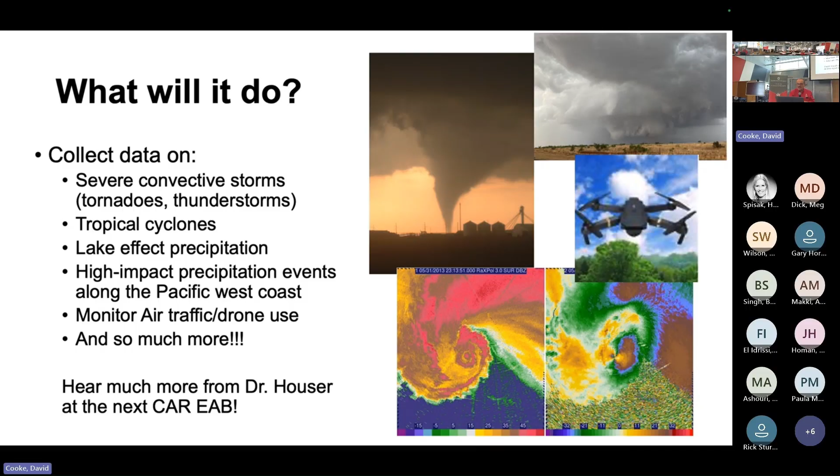Definitely one of our favorite parts of the year. For the next segment, we'll hear from each of our motorsports teams on what they've been up to for the last year and what they're going to do next year.

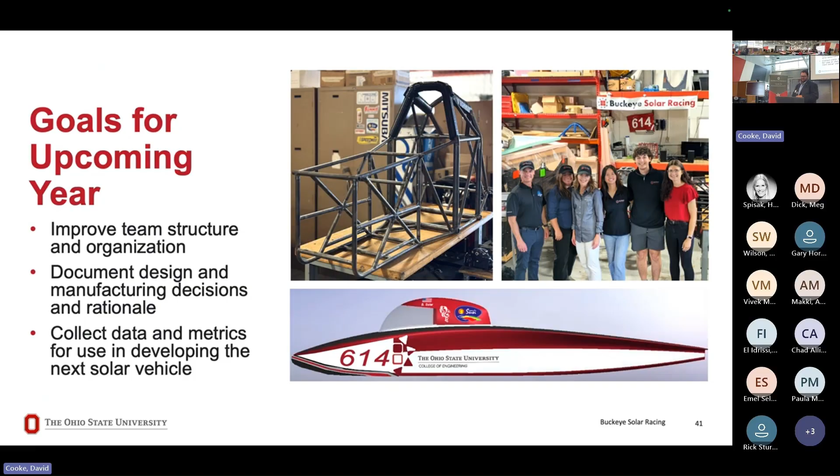So I'm here to talk about the Battery Workforce Challenge team, and I'm Niharika. I'm the software lead for the team.

Speaking a little bit about what Battery Workforce Challenge is, it is an advanced vehicle technology competition held by ANL, the Department of Energy, and Stellantis. Together we have around 12 teams that compete across North America, and our agenda is to build an entire battery pack from scratch. We've been given a bunch of cells from Samsung, from which we design our entire battery pack. We design the battery management system, and we also make our own battery pack from scratch with these components, and this allows us to create something that we can remove from the original Stellantis vehicle we've been provided and put in our own creation.

So this is our team. We have around 5 leads, and we have 5 subdivisions: project management, mechanical engineering, electrical engineering, and software. I'm the software lead for this.

Another thing about this competition is that all our teams are in tandem with a community college, which allows us to work with technicians and improve our skill in that arena as well. These are our advisors: we work with Dr. Dartino, Dave Cooke, and Ian Andrews from CSCC. We also have mentors from Stellantis who help us develop our ideas and make sure we get our deliverables on track.

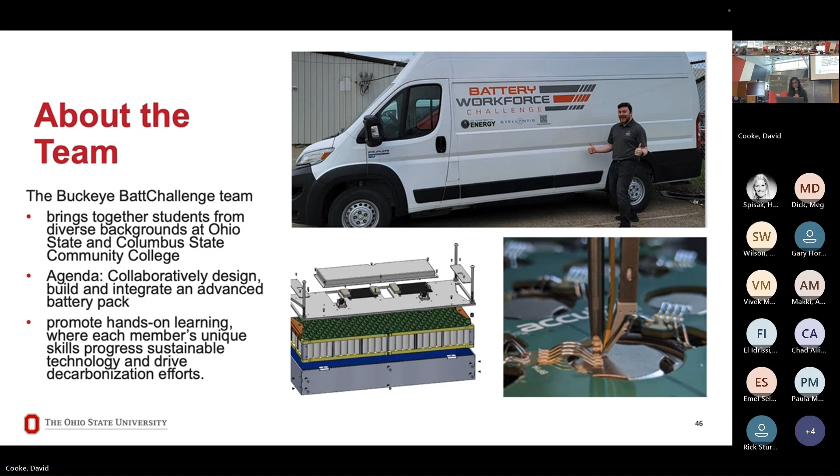So this is what our progress across the 3 years has been like. The first year we spent in team building and cell characterization, so we actually understood what we're supposed to do.

Last year we spent our time creating a battery disconnect unit and devising our design for the modules, which are very unique to our own team. Every team has its own design and their own plans on meeting those KPIs to make sure the same vehicle runs in different ways.

We also had to come up with our battery management system architecture and our thermal cooling design plate. What we did in the thermal plate was work with many other teams to create a common cold plate that would let us cool the battery down. This was a good initiative that we had with the company called Dana.

And in our final year, we're going to be putting this pack that we designed together — this is our final year right now. So we're going to put a lot of our efforts into creating the entire battery pack, and we will be integrating this into the vehicle.

A season recap of last year: we came in second overall. We also won a lot of awards in the arenas of project management and module building, as well as on the software side and the thermal side.

So we've got a lot of awards and we came second, but we're also going to be working on coming first next year. And this also comes with a lot of gates that we need to pass.

The competition has designed a bunch of gates for us to pass to make sure that we hit our goals, split into 3 different fields. The vehicle has to cross 3 gates, and once we finish each gate, we're able to move on and complete our entire vehicle system integration.

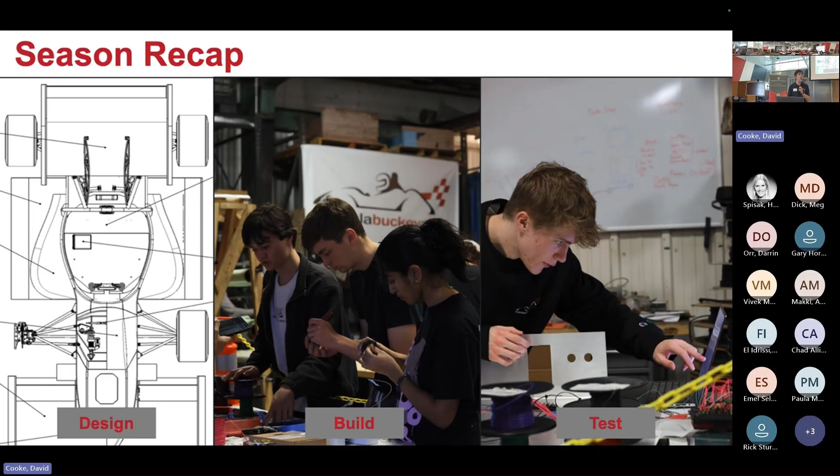In our testing phase, although we didn't have a fully running car, we were still able to test the mechanical aspects — the chassis, the suspension, and the aerodynamics package. We'll use that testing in future years to validate our future cars.

For our competition results, since we didn't have a battery pack, we were unable to race in any dynamic events. However, we still came in 3rd place for our business presentation and 47th for the design presentation, giving us 37th place overall out of 120 schools in our first ever year as an EV team — even beating 4 teams that actually competed in the dynamic events, showing how important those static events are for us.

Our goal for the upcoming year is primarily to pass technical inspection — the scrutineering that determines if your car is safe enough to participate in the dynamic events. We believe that if we pass technical inspection, we'll be able to place top 10 in EV based on how well we performed in those static events last year.

If we have a running race car, we can open up to almost 50% more points, which would drastically increase the amount of points we can get. And then another big goal for us is knowledge transfer.

We are a very young team, and this is our second year as an EV team, and we realized how important it is to teach the future generations of this team. Everybody currently in leadership didn't know how to do what they're doing when they joined, so we realized how important it is to make sure everybody on the team learns what they need to. That's the goal of this team. And then successfully build and integrate a battery pack.

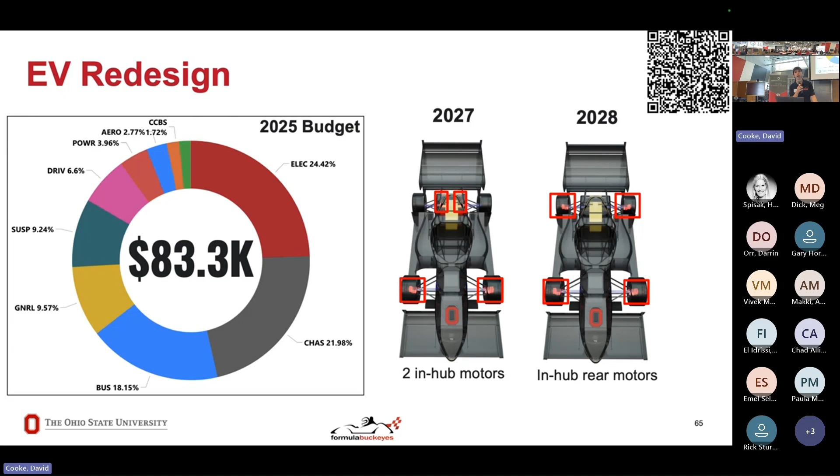The transition from internal combustion engine to EV and the complexities there are not lost on all of you now, but they've had to do it in real time. They've done things a certain way for 30 years, and they figured out most of the car had to be completely redesigned. Those numbers you saw for student engagement are real.

This team has done a phenomenal job. It attracts a lot of attention, but actually interacting with hundreds of students and maintaining them throughout the year is a big challenge. As they were transitioning to EV, I requested to meet with the team leads on a regular basis and help translate some of the knowledge from our other EV programs.

When they first invited me to a leads meeting and there were 25 people in the room, I said, you guys use the word 'leads' in an interesting way—that's just the whole team. But they were serious. They really broke into that many different subgroups and engaged teams to do R&D and process learning, and have completely invented all new systems for the car over the last year.

So it's really been phenomenal to watch, and we're excited to see the car on the ground this year and all the great things they're going to do.

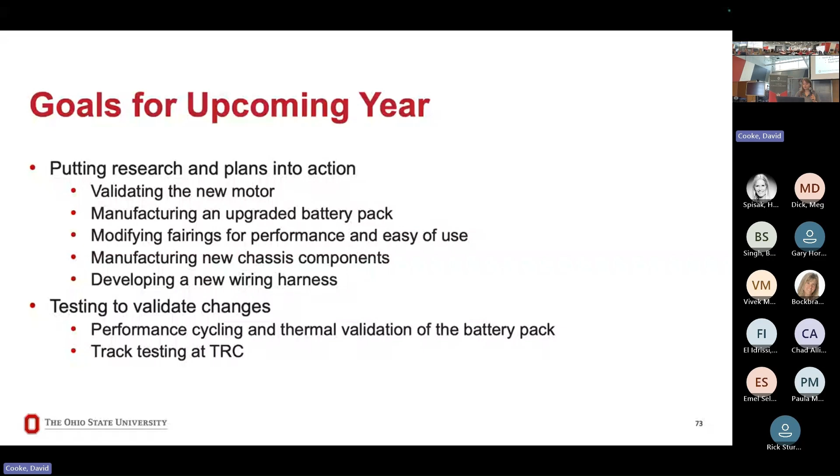Our ultimate team goal for the year, obviously, is to take a trip back out to the Bonneville Salt Flats and break land speed records again.

I'm really excited for this team. I see a lot of great work that we're doing already. I really look forward to this next year, and I hope everybody looks forward to that too. Thank you.

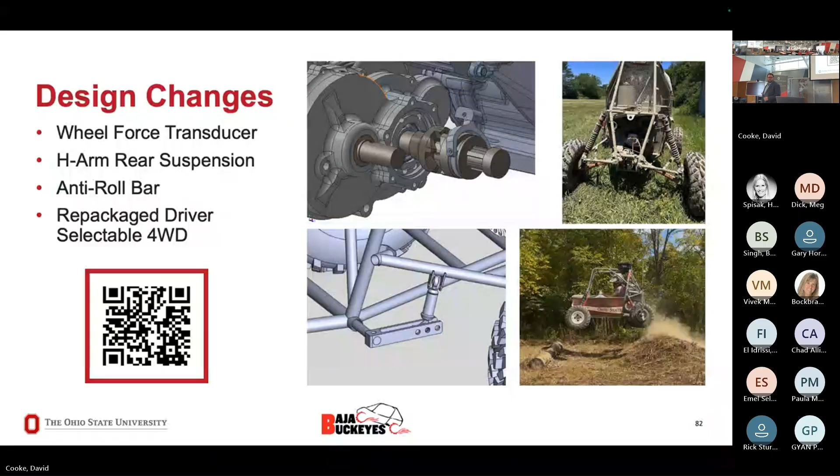So a little bit about the team. The EcoCar EV Challenge is a 4-year advanced vehicle technical competition, challenging 13 different college universities to re-engineer a next generation battery electric vehicle. So all the teams got a 2023 Cadillac Lyriq as pictured above, which comes stock as a rear-wheel drive battery electric vehicle.

And the team goes and replaces the powertrain, and this is to make a consumer-ready vehicle. So we're focused on both increasing the efficiency and also optimizing the performance of the powertrain.

This competition is kind of new compared to some of the others you might have heard about. This one is integrating connected autonomous technologies as well, similar to the auto drive, but instead of being an SAE level 4, it's an SAE level 3. And we also do a lot to identify and address specific equity and electrification challenges through outreach and partnering with other organizations to kind of spread the word on electric vehicles.

So about the history of the team, Ohio State has been involved in the AVTC Challenge Series for around 35 years now, and that has countless accolades attached to the Ohio State name. One of the current stats is out of the last 17 competitions, we've placed top 3, and of those 17, we've placed first 13 or 14 of those times. So we go out there and we go win.

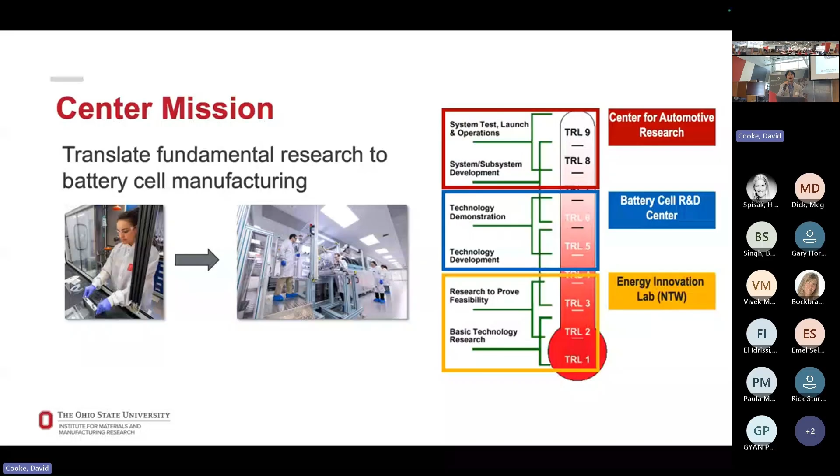One of the most successful things we are doing is utilizing this facility not only for research and demonstration, but also for educational goals and future workforce training purposes. So that is one of the meaningful events for us. We have the program called BATTERI - Bridging Academic Training Through Experiential Research and Innovation.

This is funded by an NSF program, and the goal is to demonstrate a testing bed for how we can train undergraduate students, transitioning them to naturally become engineers, and workforce training through this summer program. We actually have a 3-year grant.

It started earlier this year, so this summer was our first testing bed. We recruited an 8 to 10 student cohort from across Ohio, including OSU, Central State University, Columbus State Community College, and Wilberforce University. We trained them for 10 weeks in summer school. The goal was to train them in basic knowledge and give them hands-on experience, and not only that, we have the industry project component.

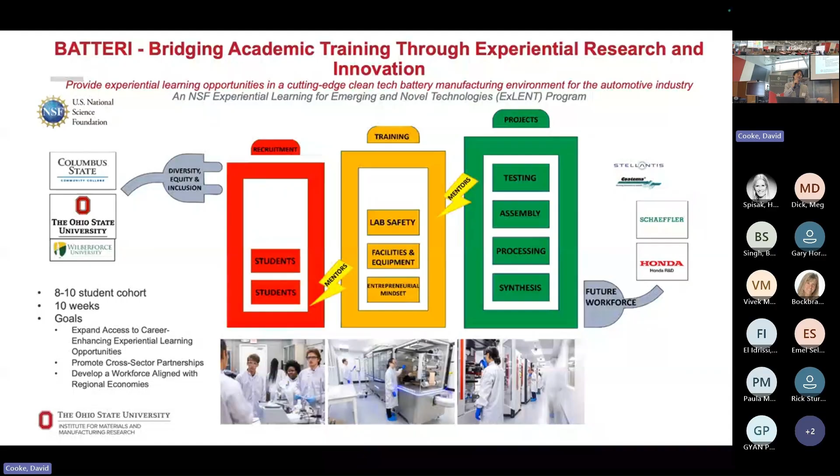So you are welcome to serve as our mentor for the future industry project. For example, maybe you can send a student to your facility, they can be trained and come back, and try to sit down with you to solve meaningful engineering solutions. That student could then become your future employee, hopefully.

These are the faces of the 8 students who joined and successfully completed this program. You can see there are different nationalities and different geographies represented. From different schools, we recruited a diverse student group as a cohort, and we could go through that program successfully.

We started by training the students in battery fundamentals in my lab, so we could train them on what type of material we use and how to process it. Then they went to a larger scale; they were supposed to be in the battery lab, but it was still under construction at that time, so they actually helped us build up the facility system and with installation. Through the installation, they also got trained.

They also helped us with some immediate issues, like how to make dry room communication easier. They have video and audio support so they can communicate both outside the dry room and with the facility at companies in Michigan or Cleveland. They communicate with each other and manage the experiments virtually.

We also have the industry trip; in this case, Schaeffler graciously hosted them. They had a two-day field trip to Schaeffler and saw the real industry setting in R&D. I think that was an excellent learning experience for the students, and the program should help build the workforce for future generations.

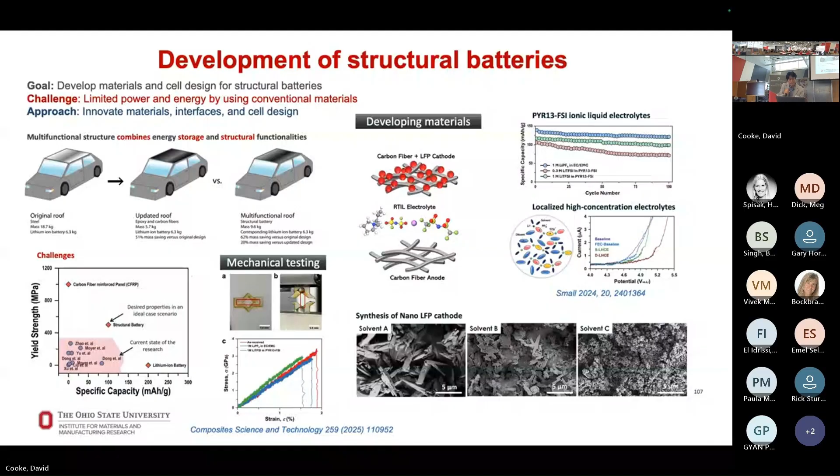So this is actually our model. We would like to get input from industry partners on what is needed in the near field, and we provide the engineering solutions. Sometimes we file a patent together in the IP domain so that we have a winning strategy, which has been very successful so far. I appreciate your attention.

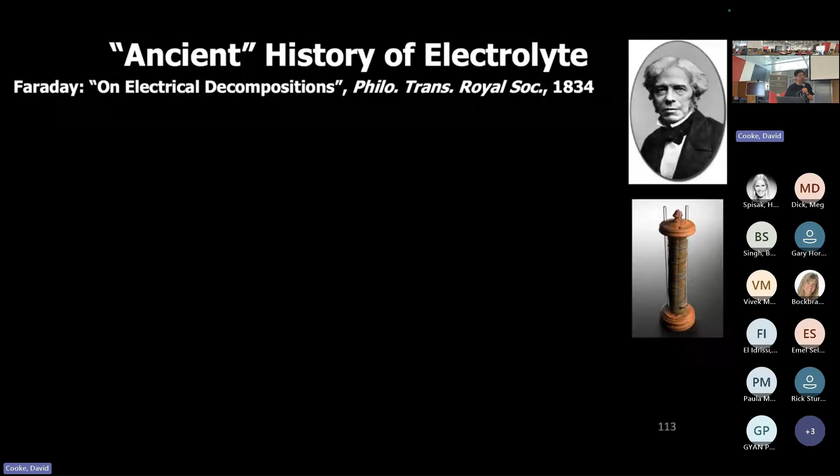The difference he found is that one solution conducts electricity, the other does not. He observed that the one that conducts electricity starts to generate bubbles at both electrodes. So he realized something must be going on. The title of his thesis in 1834 is 'On Electrical Decompositions.' Something was decomposed. In this paper, he first wrote down this word in English vocabulary: electrolytes.

It was derived from Greek etymology. First part is electro, second part is lytos. Anyone speak Greek here? No? Okay good, I will give it. So the coinage of this word means that something has to be taken apart by electricity in order to be an electrolyte. That's the reasoning he did in the paper. Something has to be decomposed.

Interestingly, in this same paper he created a series of new terms. First of all, at that time he already knew that electricity and magnetism are associated together. So in order for the electricity to go through the two leads of the battery, there must be a road for electricity - that's electrodes. This word was invented back then.

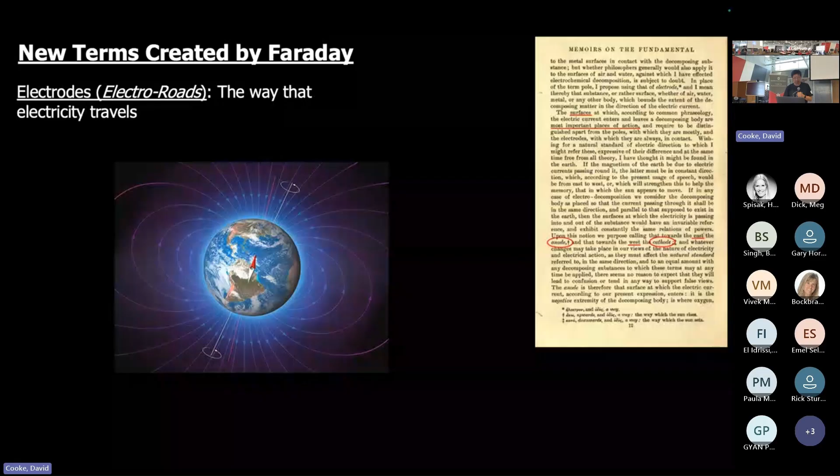Number two, since electricity passes through the solution, it must be creating magnetism. So he imagined that if magnetism was created exactly the same way as the Earth, then there are two separate directions for the ions, or charge-carrying particles, to go. How to determine the direction of the charged particles? Well, everyone knows that's the right-hand rule, right? Magnetic field and current. There's one charge-carrying particle that goes

west, from the Greek word kata, or cation or cathode. The other one is ana, Greek for where the sun rises, that's anion or anode. All these words are still being used today, encompassed in the first 30 years of this research - electrolytes, ions. And of course, those ions, anions and cations, collectively called ions, must be produced by electricity - that's the proposal by Michael Faraday. He also mentions that the most important things happen at the surface of the electrode, so that's the interface.

Basically, that's everything I have been studying for the past 30 years. But even great as Faraday was, he was not always correct. I marked the error there in red, because those ions do not necessarily need to be created by electricity. This error was later corrected by Arrhenius, another great name.

Long story short, at that time, 1884, he was studying for his PhD at Uppsala University in Sweden. He was studying the colligative properties of solutions - the depression of the melting point, the vapor pressure, and so on. He noticed that salt has a much stronger effect than sugar, so he connected the two things together.

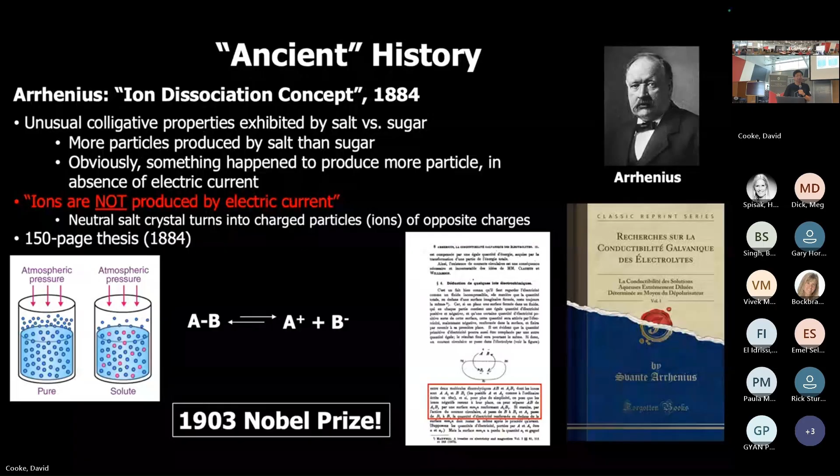However, he was very stubborn and very energetic - he communicated actively with his peers at that time. Ostwald, van 't Hoff, those people agreed with him and supported him. His paper got published - 150 pages of his thesis eventually got published. So eventually he not only passed the PhD exam and got his degree, he also got the Nobel Prize in 1903 for this work. Those are the beginnings of modern electrolyte science.

Electrolyte science can actually be divided into four different parts. The ionics - how the ions are distributed across the field, as described by models. Then how the ions move - migration, diffusion. Then the interface - how the ions or the electrolytes interact with the electrode surface. That's what Faraday told us, where the most important things happen.

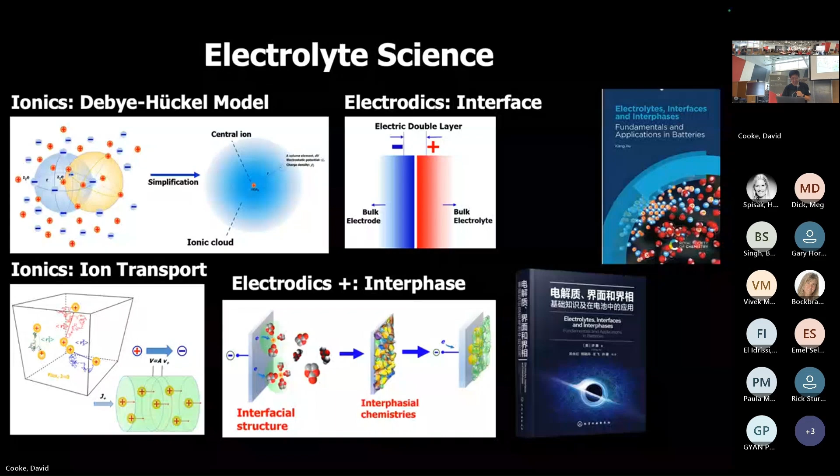I was trying to develop this new branch of teaching for electrolyte science, encompassing all these contents. Earlier this year, this book was translated to Chinese, and the sales number for the Chinese version was much higher than the English version, and we all understand why. We need to bring back the science to this country to do more new energy, battery science from the bottom up, and make battery engineering, battery manufacturing again.

In my past 30 years, I have been studying the interface a lot. My initial interest was initiated by this EC-PC disparity. At that time, I was imagining that there must be something to do with the solvation structure of the ions, the working ion, how the working ion interacts with solvents, additives, with the counterpart anion.

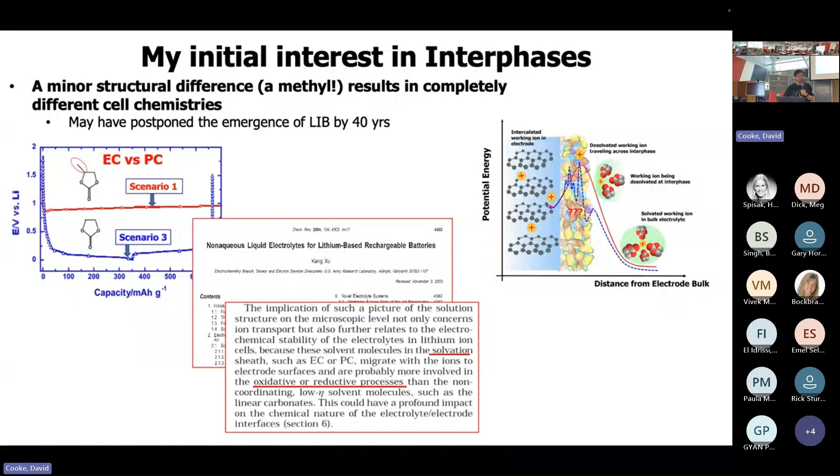In early 2000, I was invited by Professor Whittingham to write the first review article of my publication list. It was published in 2004. In this paper, instead of just reviewing what other people published before me, I put in some of my own thoughts. I for the first time proposed that ion solvation must be playing a key role in determining not only ion transport in the bulk, but also the interface and interfacial chemistry.

So long story short, this is a picture I drew as a design philosophy for electrolyte study. Imagine that a solvated ion in a perfect solvation sphere is brought to the surface of the anode. There are two possible scenarios. The charge transfer happens across this interface. If electrons pass to the central working ion, then you have electrodeposition. That's what happens with working ions which have high reduction potential, such as silver, copper, or probably zinc.

But zinc is very close to the decomposition of water. Then there's another scenario: if the working ion has very low reduction potential, it never gets a chance to be reduced. What happens is that electrons pass to the solvent molecules in the solvation structure. What you get there is that the solvent decomposes and forms a solid deposition on the surface. That's SEI or CEI, depending on which side the electron is on.

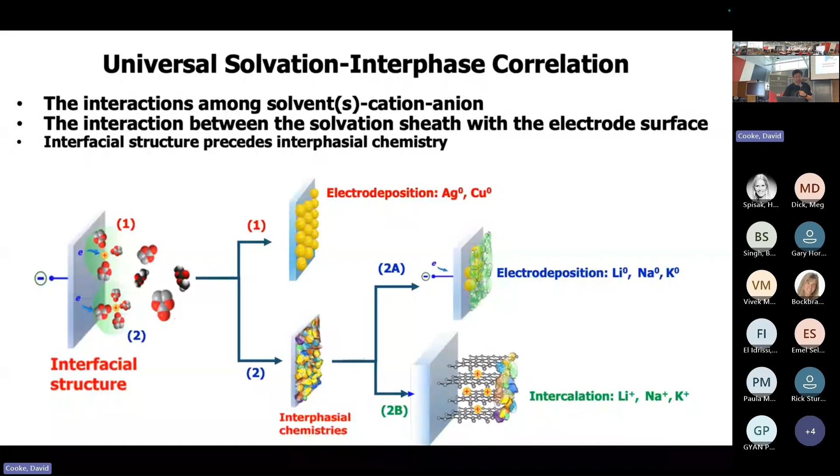Still a long way to go - there are lots of fundamental studies to be performed. I don't want to go into details, but one thing I want to mention is that one fundamental issue that has not been well addressed is how the working ions meander across the SEI, across the CEI. Because in the bulk state, those chemicals do not conduct any ion, but somehow the batteries we have today have very high power density. So if we can get this problem solved, it also answers the basic question of solid electrolytes, because SEI and CEI are essentially solid electrolytes themselves.

Now here's the second part of my work. But to begin that, I want to give you a very brief summary of the history of how the lithium-ion battery was invented. Whittingham demonstrated the first intercalation chemistry in 1972 at the ExxonMobil lab. Goodenough came in. Yoshino and his group replaced the lithium metal electrode with a carbon-based intercalation anode, so you have a pure intercalation electrode. Then Sony commercialized it. Until then, graphite was still not used.

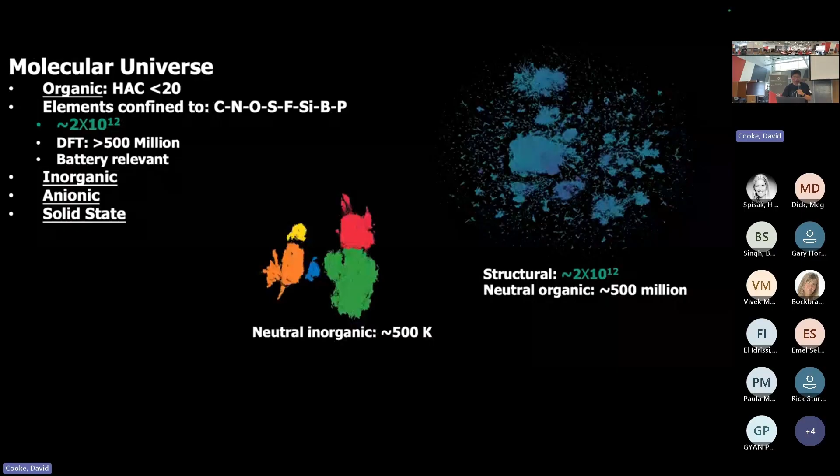This is what you see here, a map of the molecular universe. As for neutral species, all the molecules, solvents, additives, diluents, you can name it, they're all there. The only challenge is how to find the right one. We also built the inorganic and anion database. Each of those are large numbers as well.

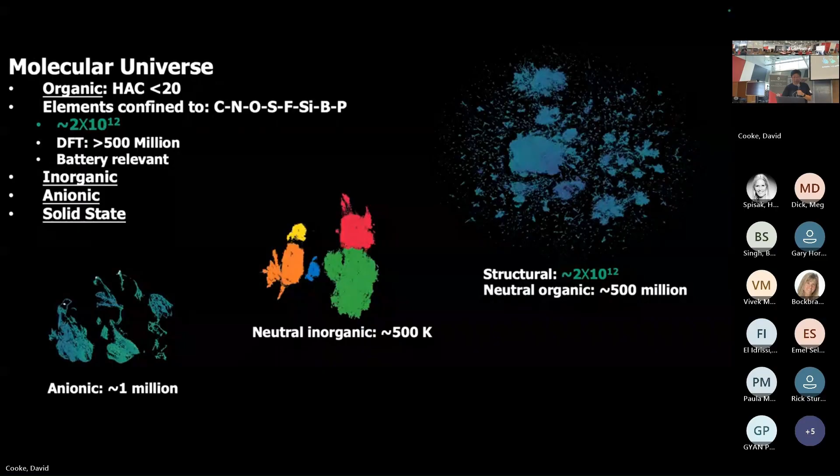We did high throughput calculation and simulation on all levels, from single molecules in the vacuum to the condensed phase, all the way to the interface. We build up different models. So this is what we do, how to help you navigate those huge databases.

We build our own large language model. I assembled a team of over 20 AI machine learning scientists at SES AI. We have our own large language model, which outperforms most of the mainstream large language models, including Grok 4, which was promoted so much by Elon Musk as AGI, artificial general intelligence. We showed that those AGI models actually do not work well in the subdomain of chemistry. All these large language models work very well in mathematics and physics, but in chemistry they always score low.

For example, we extracted all the electrolyte chemicals used by people over the last 30 years, since the invention of the lithium battery, about 600 of those. We asked the large language models to generate the correct structure given the name of those chemicals.

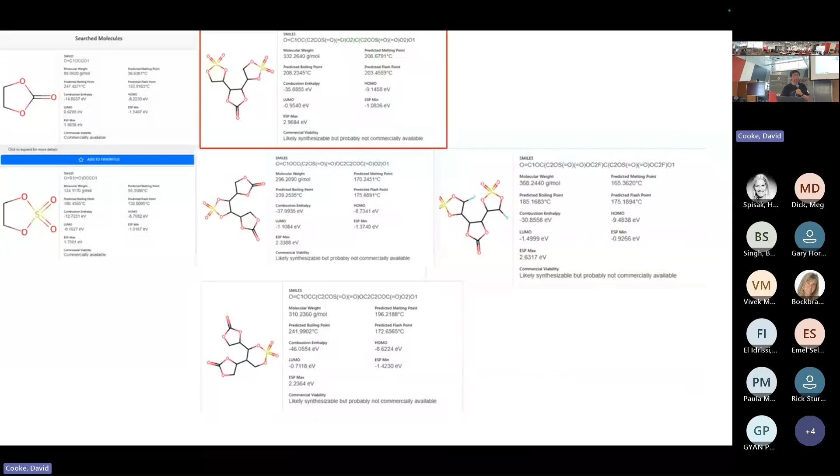On October 20th, we are going to release this newest version. We call it Molecular Universe 1.0. It's even more powerful, adding features not only stronger than before, but also predict and formulate features, which can directly link single molecular properties to cell-level life prediction and the battery physical and chemical properties of electrolyte solutions. It's really a new horizon.

What I just talked about is AI for material design. At the same time, we know that AI has extensive use in very different areas of battery manufacturing, safety, life prediction, as well as characterization.

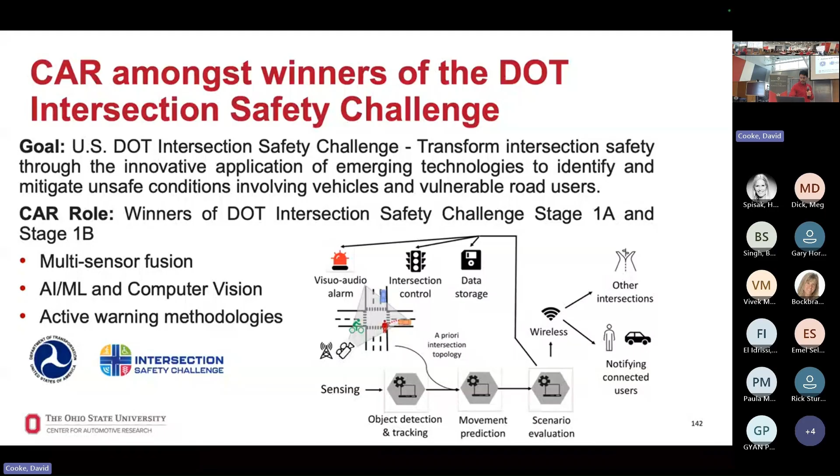And then during phase 1B, the DOT shared data collected at their pilot intersection at Turner-Fairbank Highway Research Center in DC. The idea is, okay, now we have the concept, go implement it — but validate your implementation with the data we sent. They used dummies, and we actually had collisions. The idea is, you have the raw sensor data, can you predict this event before it happens?

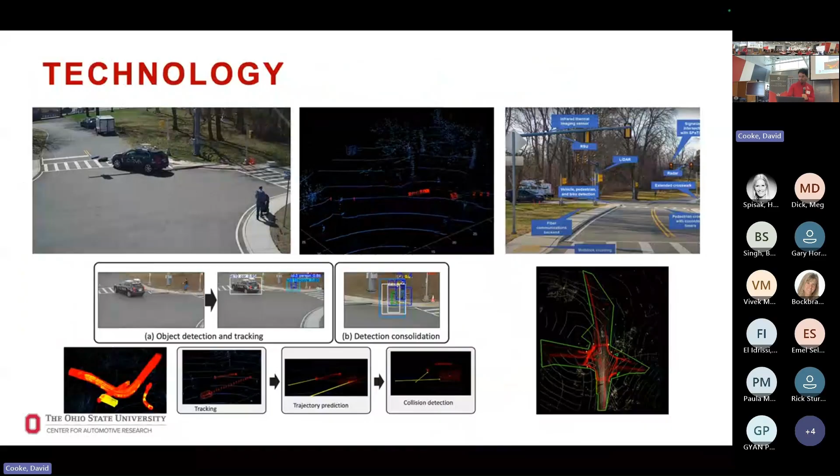And we were amongst the winners of that phase as well. And you see that's our system in work. So what's next? There's 1A, 1B, and we have some intellectual property, with the help of Ryan Zinn, for the commercialization of this at OSU filed. What is the next step? Well, the next step is we validated the system with — if you would — real data, but it's coming from a toy intersection.

It's not naturalistic, it's in a controlled environment. DOT would literally pull a dummy, and a driver with the intention of hitting the pedestrian would hit the pedestrian. Now the next step is, can we deploy this technology in a real intersection and see if we can detect the collisions with a prediction horizon that will be useful to warn all participants.

We made the proposal and won an OSU award called the Accelerator Award, and started this project 15 days ago. I'd really like to thank Mark and Nick. Mark is from the City of Dublin, Mark Bill-Saber, and Nick Hagemeyer is from ODOT. With their supervision, they advised us to use this intersection.

That's the Dublin link. The idea is there's a high amount of pedestrian flow there, which causes a lot of vehicle and pedestrian interactions near that intersection. The City of Dublin already has smart grid infrastructure there with a vendor, and we are going to use our algorithm with the metadata and raw data from those sensors to see if we can predict these events before they happen, which will validate them.

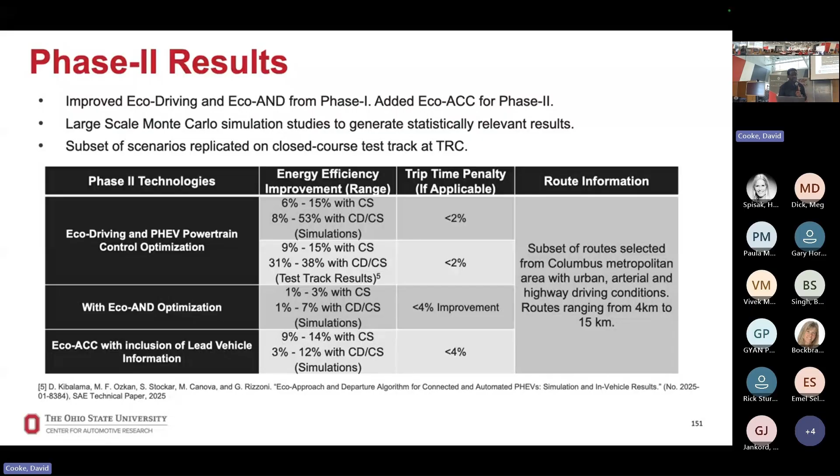This slide pretty much summarizes a lot of the different integration that has been done, from pinning different APIs, from the different developments done by contributions from students, researchers, and people on the team, to include sensing information, control and actuation information, and to integrate these controllers in real time.

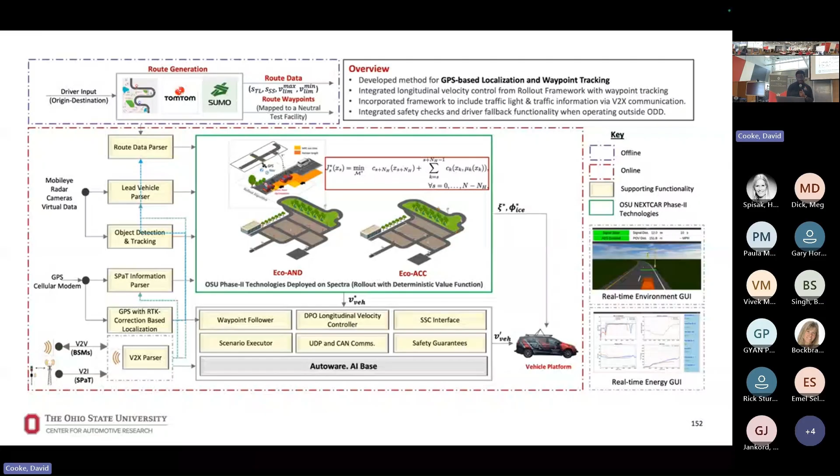What is worth mentioning is these technologies really have been developed in a flavor that ranges from not only level 0 to level 5. So it's basically dependent on what access you have to the powertrain, what access you have to the vehicle's controllers, to be able to deploy whatever flavor of the technology you might get access to. That scales accordingly with the benefits we've seen from all our different studies and test cases.

The project culminated in field data done at the American Center for Mobility. Basically, what we're doing here is in real time, we had a mixed virtual and real environment mapped across the ACM highway, which involved different traffic lights, interacting with different vehicles, and receiving signal phase and timing information, basic safety messages, and in real time making adjustments to both the vehicle's operation and velocity, in full automation around the track.

And also consequently operating the powertrain in different domains to showcase the technologies. Key outcomes from this work—I don't think this even begins to list a lot of what has been done—but a lot of intellectual property has been produced from this, in collaboration with BorgWarner.

There's a lot of publications and presentations that have been done. I don't have the exact number, but Professor Rizzoni has probably done a multitude of NEXTCAR related presentations in different places, across 50, probably, and will continue counting. The value proposition here is this has been demonstrated in different vehicles, not just one, across the different phases of the project to showcase real world energy savings.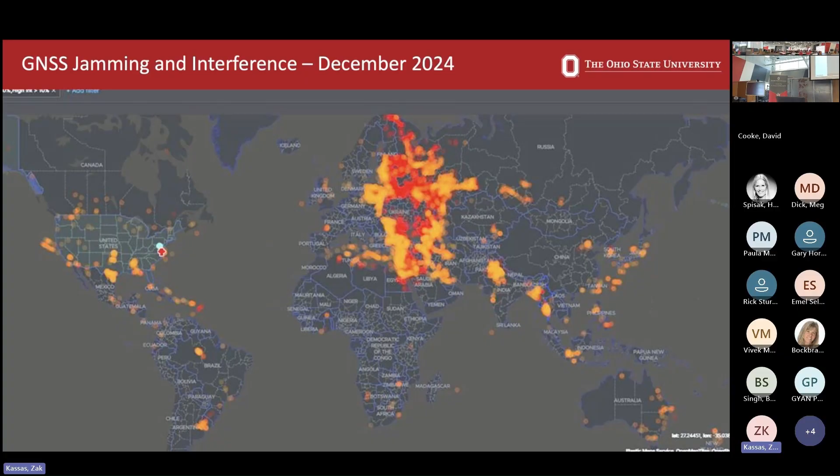So what you were seeing on the slide is just incidents worldwide. It spread like cancer, and you can see it concentrated in conflict zones, but also in places where there aren't necessarily conflicts, where this is really affecting civilian systems. Aviation is one example, one particular system where we don't want it to be impacted by this. But you can also think of your self-driving car when it's lost, it doesn't know what it is, or someone convinces it it's on this lane of the highway versus that lane, or not even on the highway altogether.

It didn't take too long for this to cause catastrophes. If you remember the Azerbaijani airline that got shot down by the Russians back last December, it was actually traced to GPS spoofing. The plane entered the wrong airspace because it didn't know where it was, and then the Russians took it down. And last summer, there were two big oil tankers in the Strait of Hormuz in the Persian Gulf colliding into each other. You probably remember there was a conflict between Iran and Israel at the time, and GPS spoofing was happening all over that region.

And last month, it started hitting public officials. I think that's when people will take it very seriously. The head of the EU, her plane was spoofed when she was flying over Bulgaria. I happened to be in Europe at the time, and there were lots of discussions that this is now not a joke—we really, really need to find alternatives.

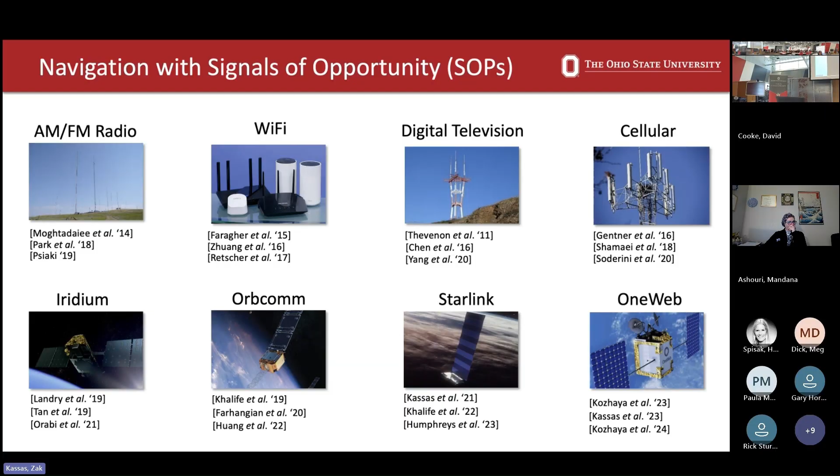So what solutions we've been developing in my lab and through the Carmen UTC, the University Transportation Center here at Ohio State. Basically, we look at signals in the environment. We call them signals of opportunity. We look at different terrestrial signals, whether they're AM, FM, Wi-Fi, digital television, cellular, and so forth. Or these signals could be coming from space. Starlink is one example of low Earth orbit satellites that we can use, Iridium, Orbcomm, OneWeb, and so on.

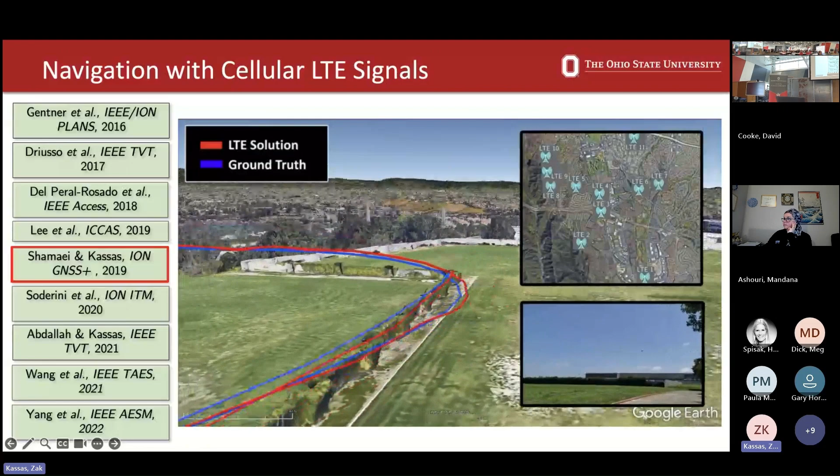So basically the slide I'm showing is some past experiments we had done to prove the concept we are developing, that you can navigate a drone nearly to GPS level accuracy by listening to cellular LTE signals. This is back in the days when I was in California, and we demonstrated that this is feasible. Then we took this to aircraft. We jumped on some US Air Force aircraft, and we demonstrated that this is also doable on their aircraft.

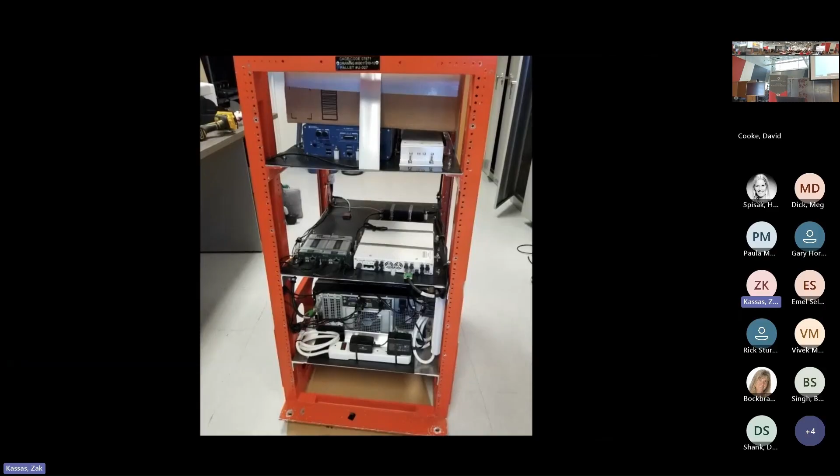So the video you are about to see shows a demonstration of this on an Air Force aircraft in the Mojave Desert, as well as over the Inland Empire, Riverside County in California, and different locations in Southern California, showing that if you lose GPS, can you listen to cellular infrastructure down there and use it to navigate the aircraft and basically know where you are.

So that flight campaign really delivered more than what we were expecting. It surprised us that there are so many good signals you can use, and it's not gloom or doom. If you do lose GPS, there are things you can do without having to build a completely new system similar to GPS, which costs billions of dollars to operate annually.

Yeah, so basically this is just a demonstration of this older work, as I said, proving the concept and showing that you can navigate with these signals.

No, disconnected. We are trying to upgrade our computer over here. Okay, so I think we might have more success. Oh, there we go, that's the video. Okay, we see it. I think it's now in real time, so I'm excited.

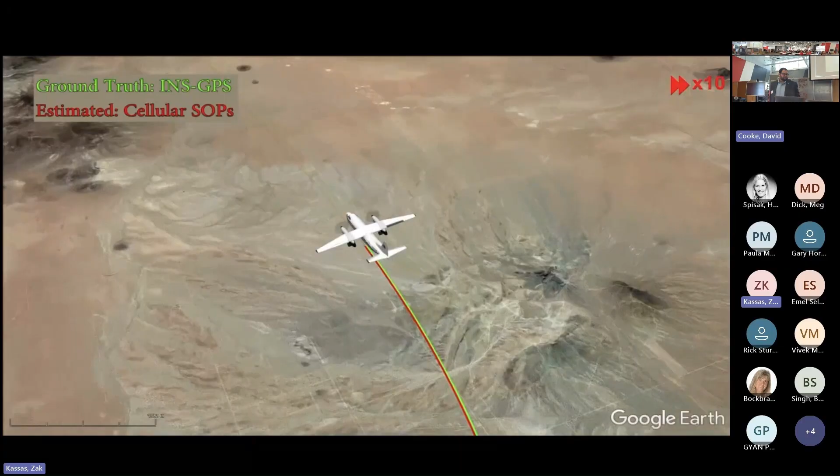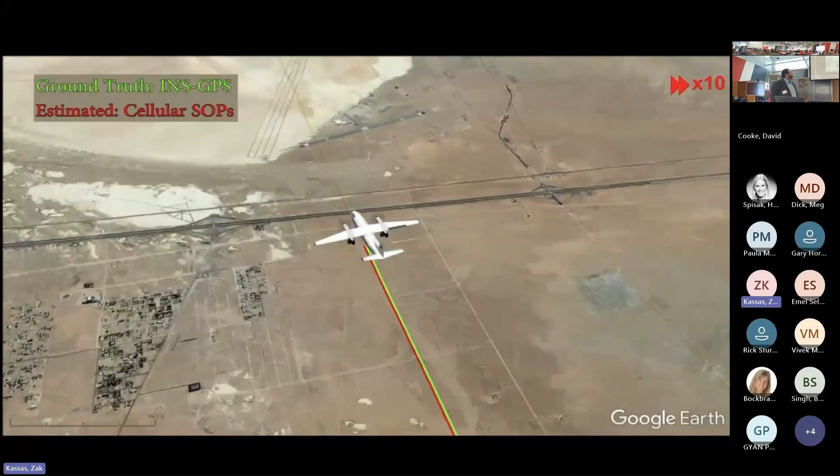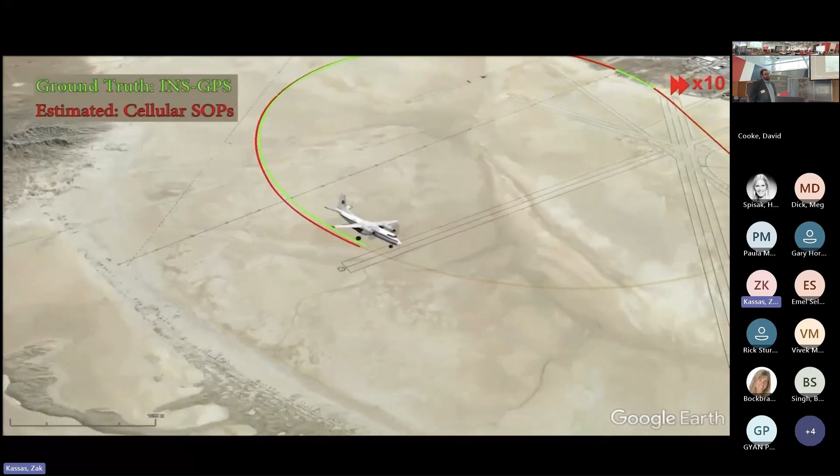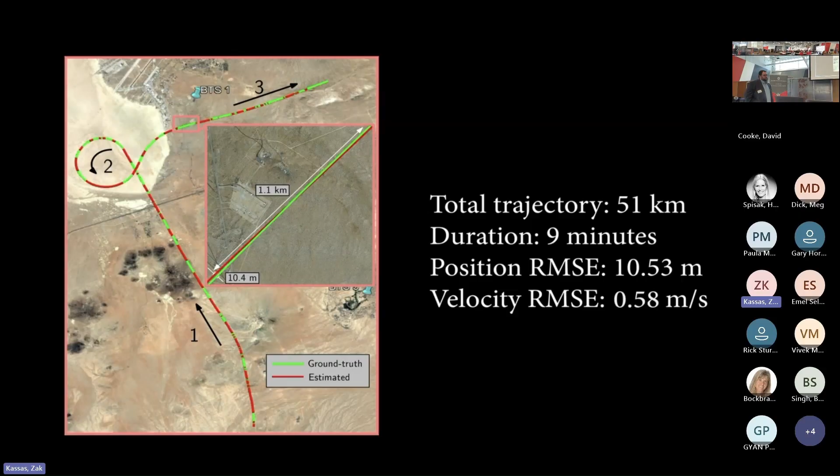All right, so you can see that. Look how accurate we can get to navigate the plane by listening to cellular towers underneath you. Now, this happened the week just before the world shut down due to COVID. I still remember we were supposed to fly for two weeks. We flew the first week, and then all the pilots were asked to fly back to their base, and then the world shut down. So these are not new results, but this is what you can do with LTE, not even 5G, which was not completely rolled out, especially in those rural areas you see here. And the FAA didn't allow us in the first week to fly over 23,000 feet above ground level because we were getting close to a lot of air traffic in LAX and Ontario's airport. So it always bothered us whether we could fly higher with those signals, and whether we could use 5G, because now we live in the fifth generation era of cellular infrastructure.

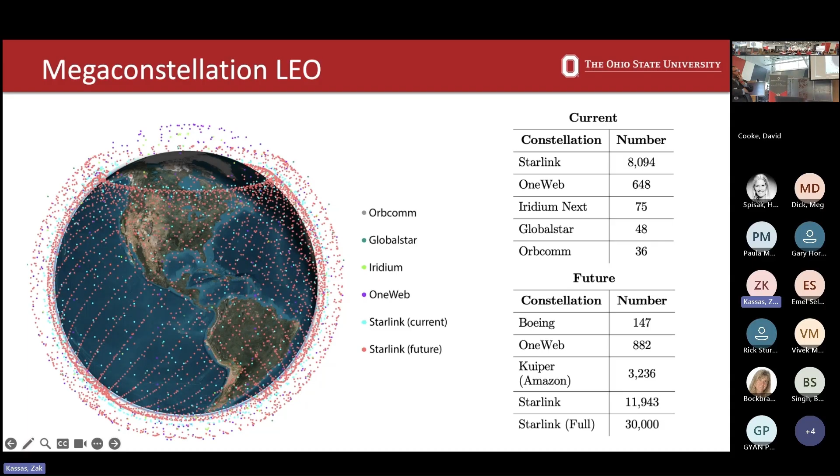And while that is happening, LEO constellations took off, and now they call them mega constellations. You're probably aware of Starlink, but there are others: OneWeb, Amazon Kuiper is also planning a mega constellation. Starlink, as of this month, has more than 8,000 satellites in orbit, projecting 12,000, and asking permission for up to 30,000. China is building two mega constellations similar to Starlink, 15,000 and about 12,000, and Europe is building a mega constellation too. So it is a new space race, if you will. So the question is, can we do this?

For LEO satellites, you have two different schools of thought. They are not only launched for internet connectivity and for cell phone coverage and so forth, they are also launched as PNT sources, or position, navigation and timing sources.

So you have a few commercial constellations that say we will solve the GPS problem by having satellites dedicated for navigation. Then you have other satellites that are transmitting a communication signal, and we are going to dual-purpose our satellite to also serve as a GPS-like satellite.

The approach we are taking is more sustainable from a spectrum point of view, from an infrastructure point of view, and even from a cost point of view. We are saying, why do we need to do this? Why don't we be opportunistic about any signal coming from space and use it to navigate? Similar to what we did with LTE and 5G, they are not intended for navigation, but we exploited them for navigation.

This is not an easy problem, and I think this is what makes it intellectually interesting, at least to me, because there are three segments in this layer of navigation. The first is the space segment, which we will not worry about, we'll let the providers launch their constellations. We will develop a user segment, the receivers you could put on a plane, a car, or a handheld device. And we will build the ground segment that monitors these satellites and sends correction data to the users.

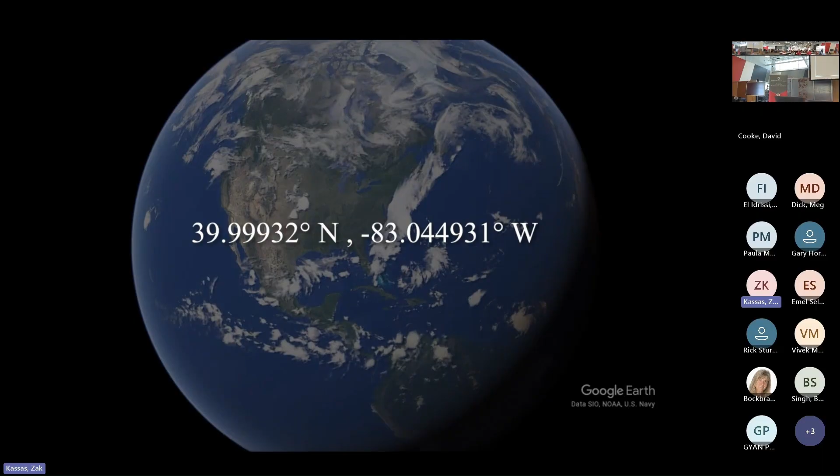We built receivers that are able to listen to Starlink satellites and other satellites. I think because Starlink has the most satellites, they are the most exciting from a navigation point of view, because you could get really, really good accuracy if you know how to exploit their signals. So you can see here, we call it the ASPIN ground segment, that's my lab based in the ESL.

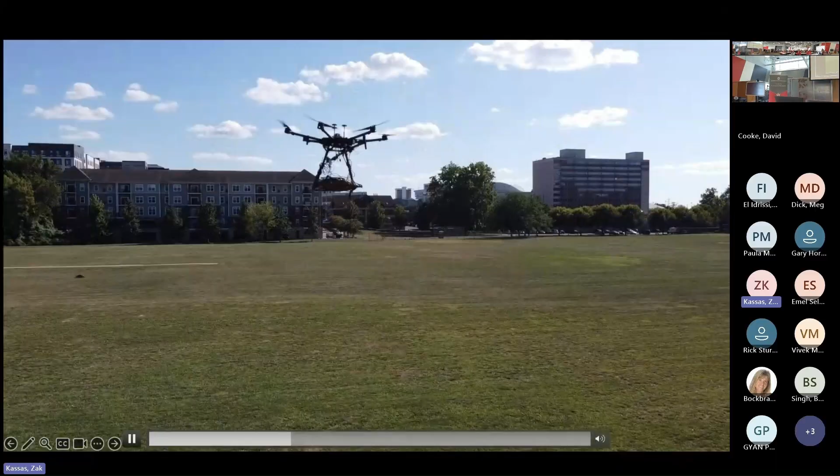We flew this drone in Tuttle Park last summer, thanks to CAR, to David and Meg and their team, who helped us get this going. You see here the drone and very low cost hardware. If you remember a few years ago, I showed our drone, similar to this one, crashing in California because we lost GPS on the drone. Hopefully we don't have that experience again, because if you lose GPS, you can listen to Starlink and use it to navigate.

This is exciting because last year we got a congressional earmarked community project funded through NASA, about $1 million, to develop and demonstrate GPS alternatives for enhanced security of the national airspace. The idea is we are in the process of purchasing an aircraft, parking it at Ohio State's airport, and starting to demonstrate what you saw with the Air Force flight campaign and the UAV, but on a real aircraft.

We basically have pretty much control over it, so we can fly whenever we want, and hopefully go to different regions and so on. While we are waiting for this, I tell my students, if you want to start going to the gym and you don't have membership yet, don't just sit on the couch, maybe start by doing push-ups and prepare yourself. So to prepare ourselves for the aircraft to come, we asked, what can we do?

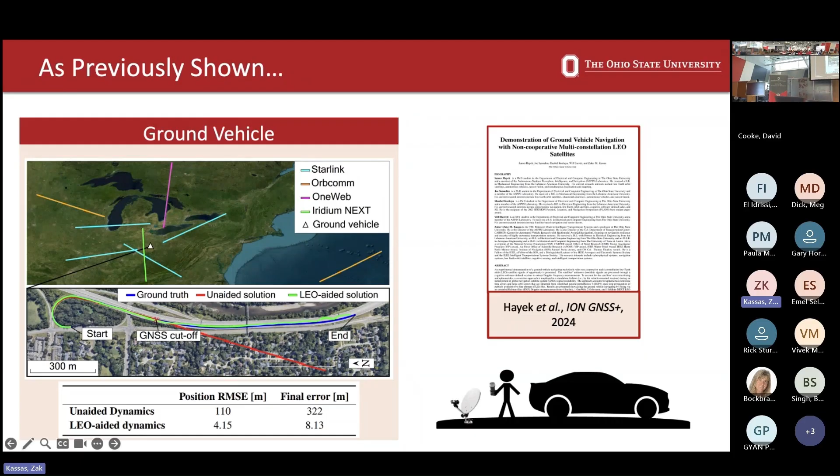If we do a stationary campaign, we just listen to signals and localize a stationary receiver, but that's not exciting, and it's something we had done not too long ago. If we put it on a ground vehicle, the maneuvers aren't similar to an aircraft, and that's also something we'd done last year. So that's not exciting either. UAV, I just showed you UAV results. So what do we do? Urban air mobility? Well, we don't have access to those yet, they're going to come online hopefully in the next few years.

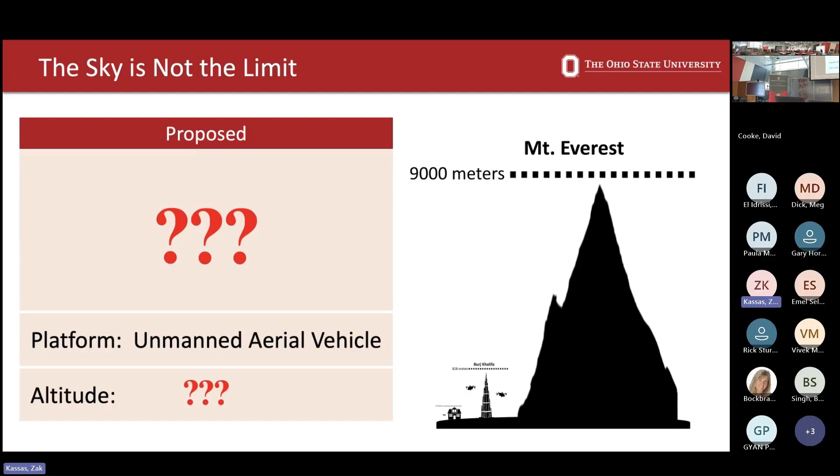Should we go to Mount Everest? That's high altitude, right? But I'm afraid of heights and don't want to go there. Should we jump on a commercial plane and do our test? Well, I don't want to get in trouble with the FAA, you can't just go willy-nilly and do these tests on commercial planes. Should I talk to my friends at DOD and try to get on the Blackbird? That's an option, but I don't think we can do that very quickly.

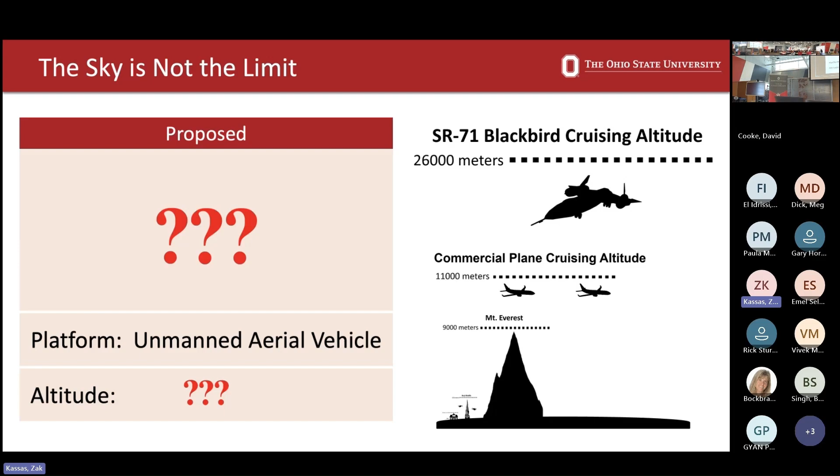So we started running out of physical phenomena, and we came across this story of Icarus from Greek mythology. Icarus was trying to escape from the island of Crete, and his dad told him don't fly too high, close to the sun, because your wings will melt and you will burn and fall to your death. That didn't deter us, we called our mission Icarus.

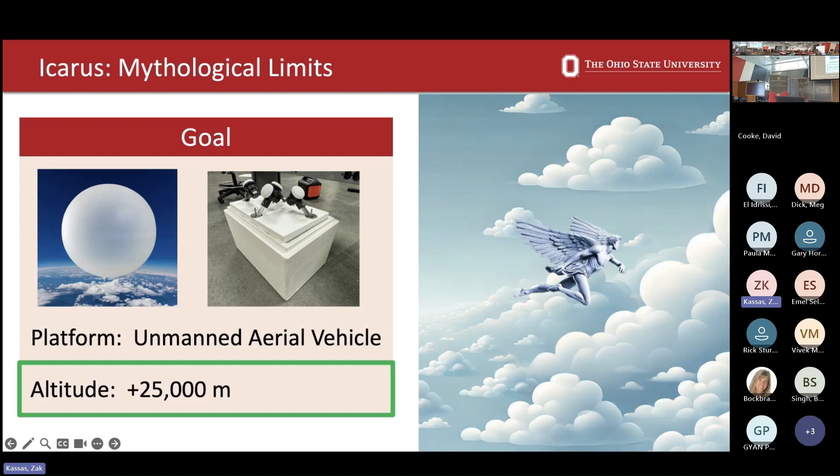We worked with our friends at Sandia National Lab to fly a weather balloon to more than 25 kilometers above ground, and I'll close with a video showing what we did. This is in preparation for when we get the plane, so we know what to do and what payloads to build. Of course they'll be slightly different because we'll have more payload capability on the plane.

It was an effort that took a year. We had a bunch of undergraduate students who used that as their capstone project to build the payload. We wanted to fly it for nearly half a day. This is Brutus blessing our payload before takeoff, nearly half a day to more than 80,000 feet above ground.

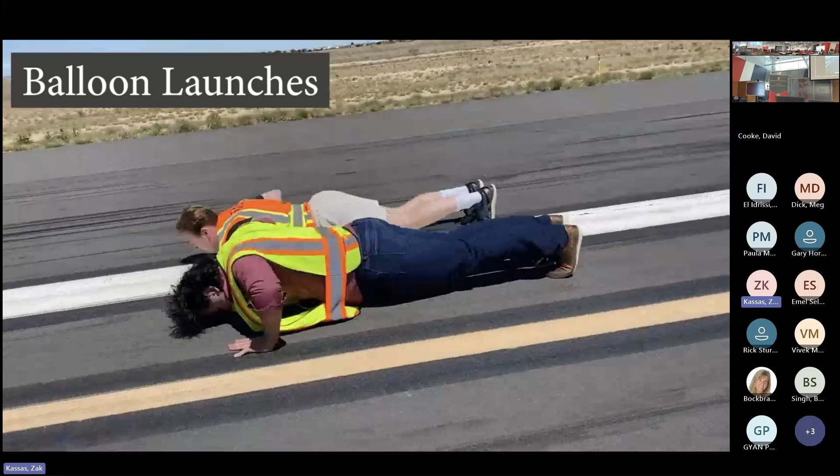So you see here the balloon getting filled with air. We did the OHIO - there were only 3 Buckeyes on the team, so we used the balloon to be the last O. Then they shut down a small regional airport for us in New Mexico, and we were doing push-ups on the runway for good luck. But of course, just wishing for good luck doesn't mean everything will work, and the experiment failed.

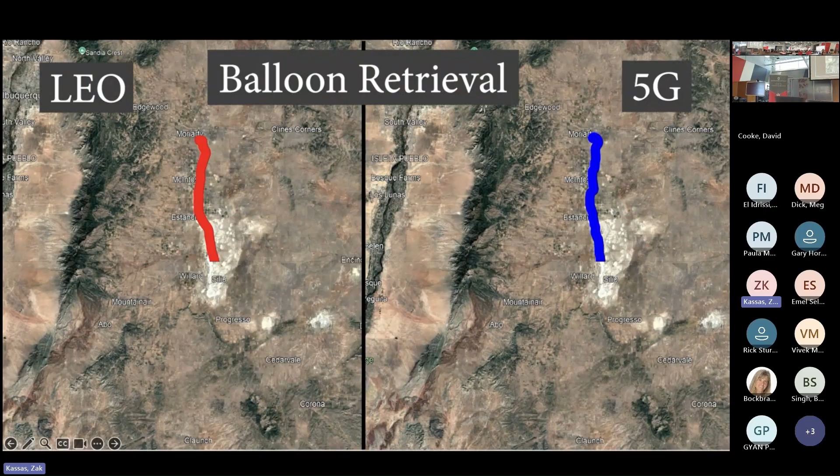So unfortunately we'll have to wait for the plane - no, I'm just kidding. We actually managed to get the balloon, the payload, back in shape. Thankfully it didn't completely get destroyed. About a month later we got another team of professionals, but this time we managed to launch the balloon. We collected signals from LEO satellites and from 5G.

It traveled 65 miles, and it's uncontrolled, basically just going with the wind. Then recovering the balloon was a whole different story, going through ranches, government land, fighting with Bevo here from UT, not knowing that he will come to Ohio State and get his back whipped. We recovered both payloads, the 5G payload and the LEO payload.

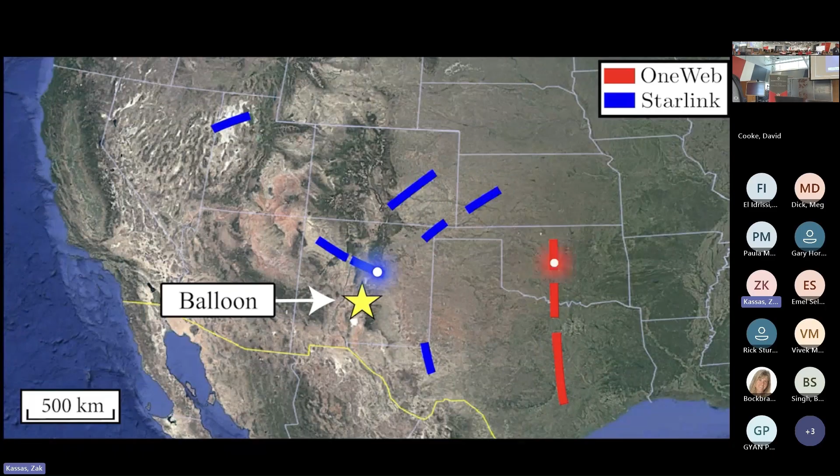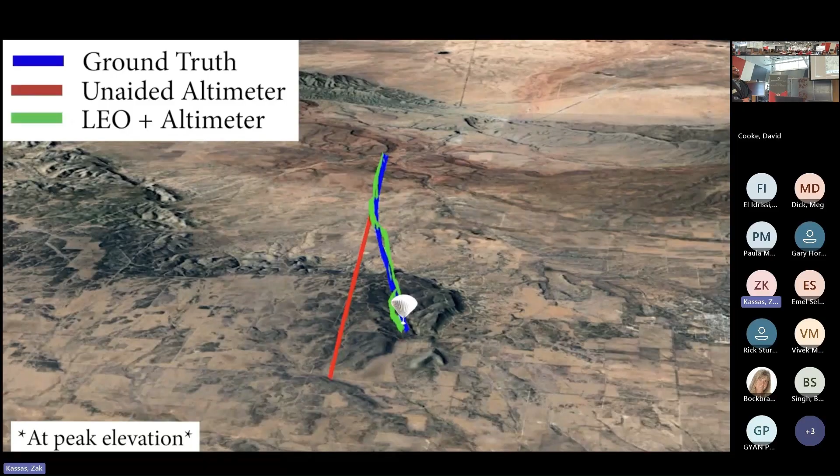This is the LEO payload, using Starlink and OneWeb. And if you notice there, it's 22 degrees per second was the yaw rate when we got all the way to 80,000 feet. So it's a pretty disturbed environment - the aircraft will not experience something as crazy. But if we can show it on a balloon, I'm very hopeful that we can also show it on the plane. Look here, if you lose GPS, this is your unaided altimeter, and you really would be lost.

You wouldn't know where you are, and that's the scary part, right? You are lost, whereas what we're able to show is the green, very, very close to the ground truth trajectory. So that's with LEO. Let's go to 5G - also with 5G we used different towers along our trajectory, and some of the towers were tens of miles away from us, and the same thing held.

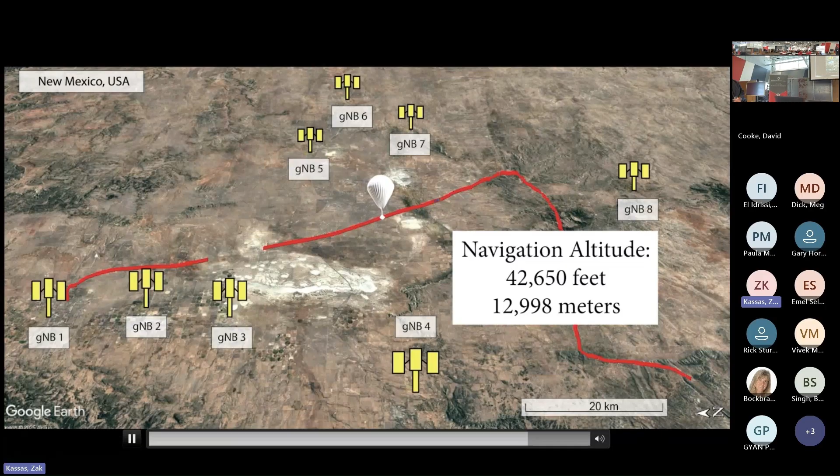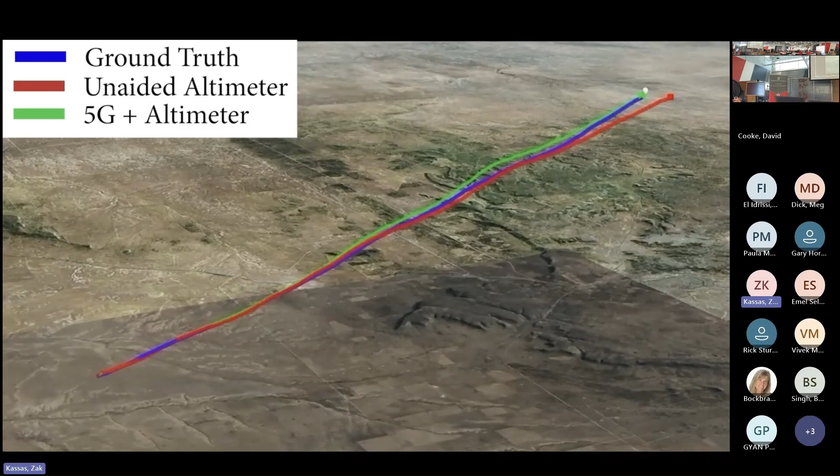It's fascinating because 5G towers are not supposed to service aerial platforms - their antennas are tilted down and they're supposed to serve ground users. But we have very high sensitivity receivers that were able to listen to these towers and navigate the balloon all the way at these crazy altitudes.

So with that, I thank you again, and I apologize for the little hiccup that we had. I thank the Office of Naval Research, Air Force Office of Scientific Research, Department of Transportation, NSF, NASA, Aerospace Corporation, and Sandia National Labs for funding this work.

Happy to stick around for a couple minutes, take any questions before I jump on a plane, and hopefully spoofing will not happen on that plane. Any quick questions for Zak?

I think we're good, Zak. Safe travels to you, and thank you for making time for us. Hopefully next time I will see you and I will show you our new airline. Okay, thank you, take care. Thank you, bye-bye.

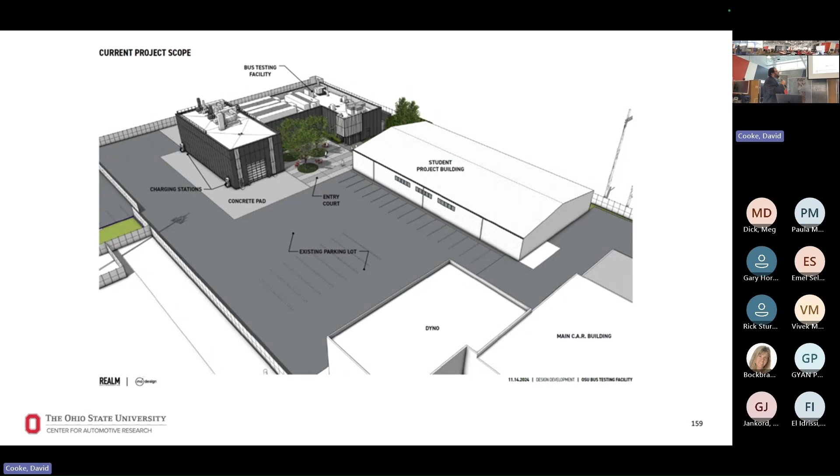So this is our back parking lot of the Student Projects building that's existing on the right. And as a reminder, this is the new building that's underway in the back. This is entirely lab space, no people space in this building. A large chunk of that is for battery laboratories, and so we're going to move all of our battery testing into that facility.

Big focus of this program has been to develop a safe space that can handle very large format batteries. We can do up to a megawatt hour pack. The room is certified to have a large quantity of lithium in it, and we're going to move our cell, module, and pack cycling into that new facility.

We're also in the final stages of locking in some of our government funding to be able to put in a walk-in thermal chamber, so to be able to do large packs just behind that facility. That's underway right now. There's also a large hydrogen fuel cell lab. Off the bat, we could do up to 250 kilowatts, eventually up to 500 kilowatts of load testing on bus and truck sized hydrogen fuel cells and systems.

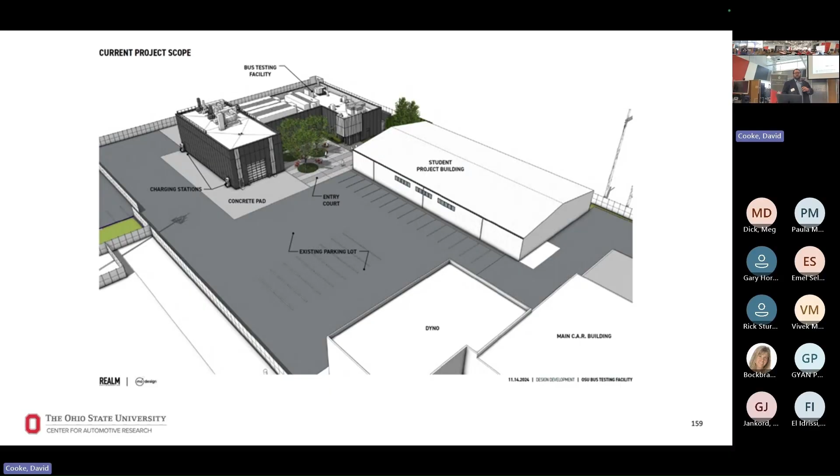That lab will also house our smaller stack. Right now we have a 1 kilowatt demonstration stack for teaching, learning, and research, and we're envisioning something in the middle there - a smaller stack for research until we go up into the full vehicle systems. We also added a large high bay space, a flex space, completely thermally controlled, that will allow us even more space to continue working on vehicles of all shapes and sizes in that facility.

For an overhead view, the large building to the right is the existing CAR building, the student building, and the new expansion is in the back. So let me walk you through some of what we've seen since they broke ground in June.

This was our parking lot just prior to construction. We emptied the parking lot out completely, probably for the first time in 25 years or so. There were a few storage containers, and we found a few professors' items that aren't even with Ohio State anymore. It took a long time to purge 20 and 25 years of history, got everything out of the back and relocated. Through this project, we were able to add about 40 to 50% of total land inside of the CAR fence.

They allowed us to go into the parking lot behind us - this is immediately behind the CAR. At the beginning of the project, they said we could have the grass off to the right but none of the parking lot, and then we got 1 row of parking. Over the course of the project we got to move that line a few times, so now we've added significant acreage inside of our fence. The new fence line is around that entire parking structure.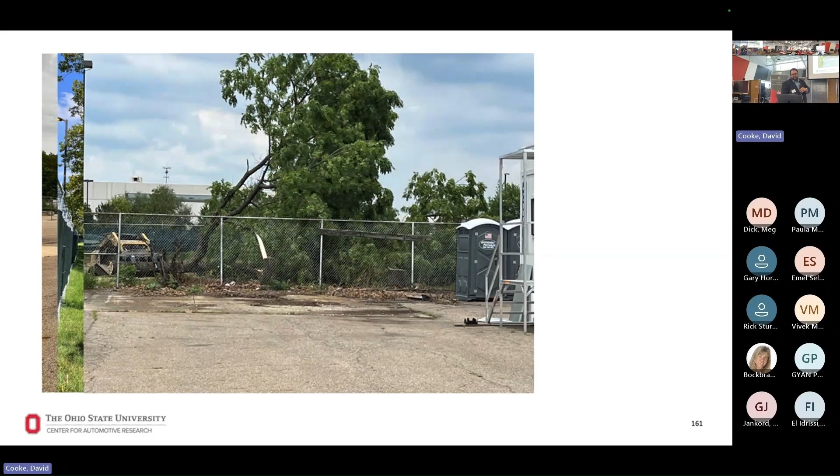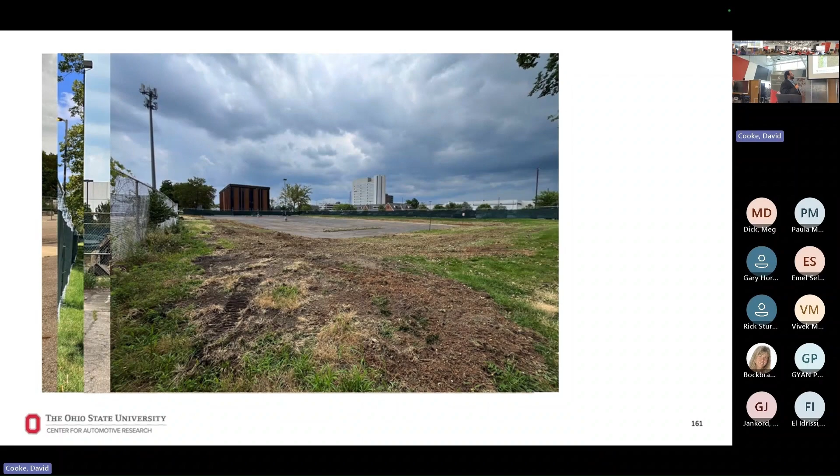Early on they cleared the whole land, emptied it out, and put in the construction fence. There is no water retention anywhere around this area, and for those of you who have spent a lot of time at CAR, you know even after they upgraded storm drains, we still have lakes and floods all over. So one of the first projects was that entire zone behind the building - they had to go underground with the water retention.

This was just a small chunk, about 4 foot diameter steel tubes. I think in total we had like 50 or 55 of those come in for a 250,000 gallon storage tank built about 20 feet under the ground. The idea is it's going to serve this whole area as a large capacitance during storms, with a single 24-inch outlet going into Columbus's storm system. So we basically have a big capacitance to build up underground, and then it slowly leaks into the storm system at an allowable rate for that area.

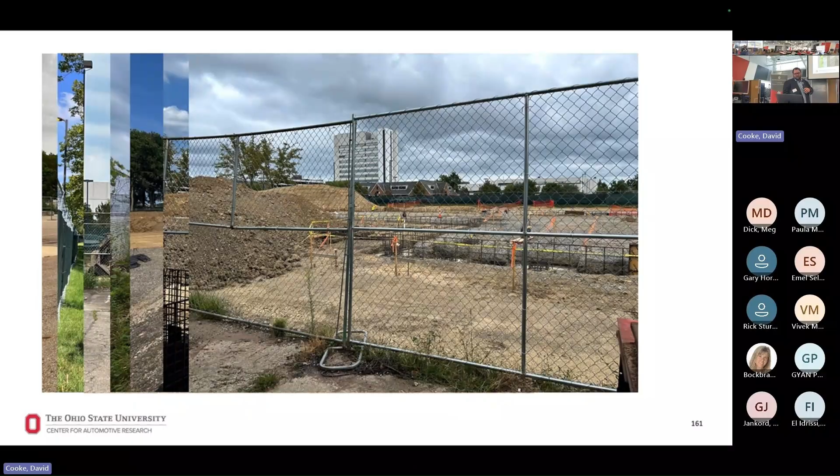So all that was put in over the first month, and they put in that entire system. At this point all of the foundations and concrete is built, and just last week our crane arrived and they started to set steel. They'll be done by the end of October with the steel structure, and they have a goal of getting the building completely enclosed before the cold season. Then on their schedule, they'll build out the entire inside of the building over the cold season.

And do all the final concrete and parking lot work into next spring and early summer. At the moment, move-in date would be right around our EAB meeting a year from now, when we'll start to be on the building and power on. We'll see how that progresses over the next year - maybe we'll have a meeting here soon in the new facility.

So with that construction underway, we're certainly getting prepared for the new labs, starting to invest in some equipment and get prepared for the big move. We're thinking about new programming we can do in there, and we're also looking around the property and moving forward on a few other improvements for CAR.

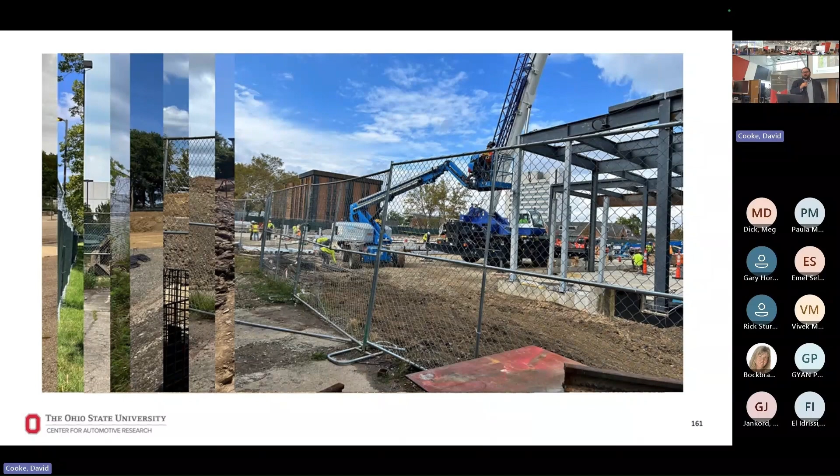We'll fully debut the plans to overhaul our student building. If you were at the last meeting, I gave some hints. We talked about some of the challenges we're having in the back building where we support all the student projects you heard from today. Some updates we desperately need to make, but also ways we can expand the programming, improve quality, host more students, and improve safety. We've spent the last six months since we saw you on a deep dive into this.

We actually engaged architectural and engineering firms. One of the early things we had to decide is whether we can even renovate that building. It's a really old structure, doesn't have a sprinkler system. Where do the code lines fall? Is it something we can renovate? The great news is yes. By 300 square feet, we fall under the requirement for a lot of very complicated systems we'd otherwise need. So we're going to move one wall back a little, and now I think we've got a really great modular plan.

A lot of what we can do depends, of course, on where the fundraising dollars come in, but we have about 5 to 6 steps, depending on investment, to drastically improve that building. The full pitch deck will be at the October 17th event. I just wanted to give you a little teaser from the external shots.

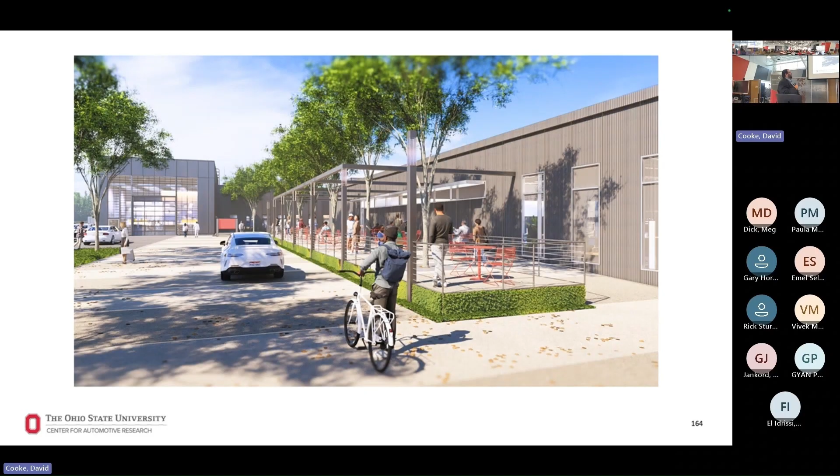So a few different programs ranging wildly in price. We can make some investments in really cool outdoor space if the fundraising campaign allows for it. We're starting to look at those things with the architects, and we hope to kick that off later this month, and over the next year put real effort into making this a reality for the next generation of student projects.

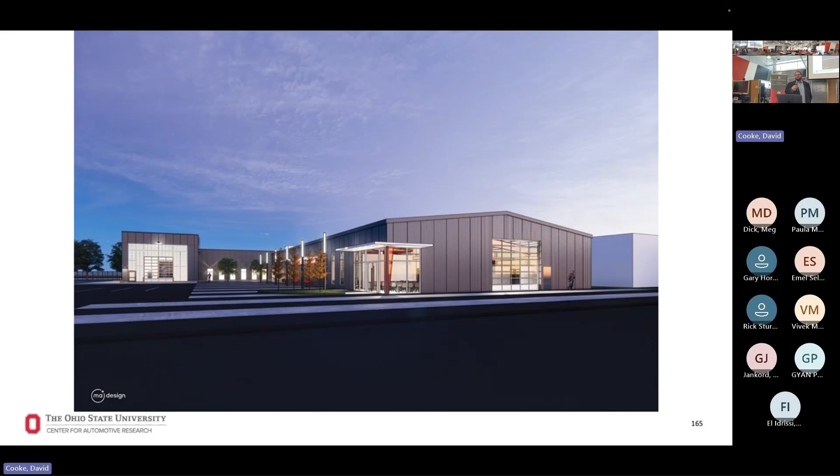So look forward to those of you who can make it in October. If you're not in that area or can't make it, let us know. We'll be formally moving forward with this over the next year, so excited to talk to you about how yourselves and your companies might be able to get involved and support the program. With that, Giorgio, you're up.

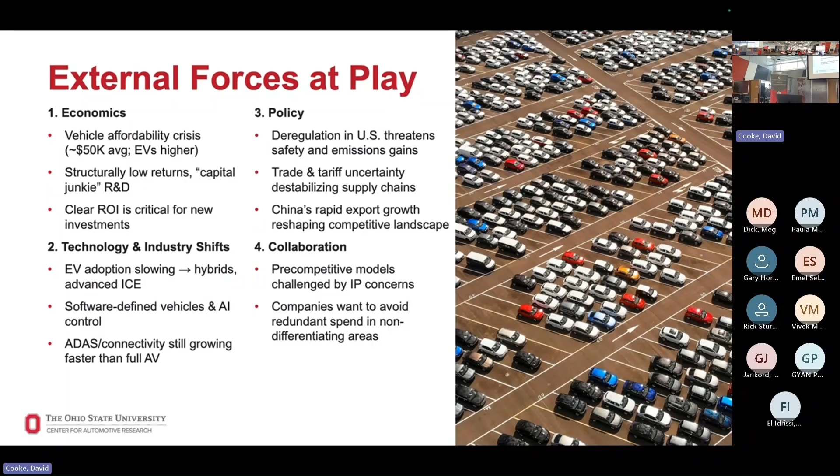So the idea is, in this changing landscape, how can we address some of the emerging needs in such a way that we continue to provide you with the human talent that your companies need to succeed, and address interesting challenges in new technology, software-defined vehicles, electrification in whatever form, all of the connected and automated vehicle subtypes, ranging from the evolution of today's ADAS to full automation and the underlying safety and security considerations that go with all this.

And we do quite a bit of work in the world of commercial vehicles, not only trucks and delivery vehicles on road, but also off highway, agriculture, construction, mining. So that sector, the commercial vehicle sector, is much more fragmented than the passenger vehicle sector and has a broader range of challenges and use cases. So there are many challenges.

So the question we are asking ourselves is, given that we believe, and we hope you believe, that student talent generated by our programs is the most compelling asset we offer, and that we continue to grow and evolve our R&D assets in terms of physical facilities. We heard today about, and you will see soon, the new battery cell manufacturing lab. But also intellectual assets, as we continue to recruit new faculty and engage them in research related to mobility, transportation, automotive engineering.

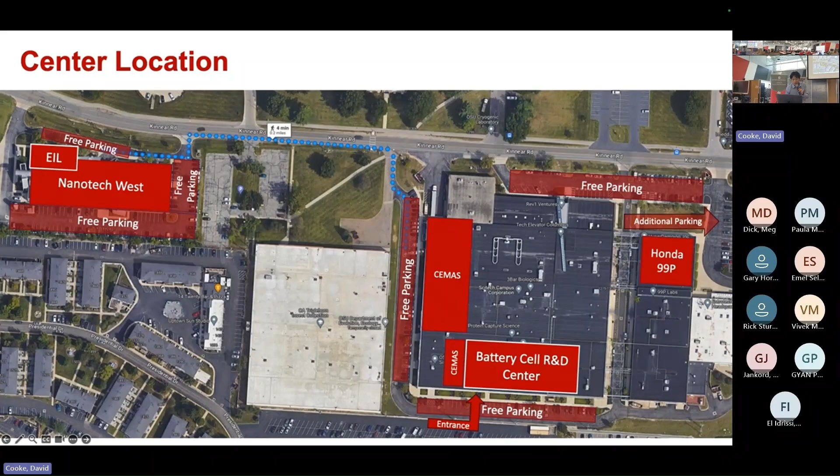The base of the battery R&D center is actually 22,000 square feet, and we got a total investment of $30 million to build this facility up and running. Among that, 4,000 square feet is dedicated to a negative 40 degrees Celsius dry room. Not every piece of equipment is ready yet. We have the full line of equipment for pouch cell, but the space for cylindrical cell is phase 2. As soon as we get funding, we're going to install the cylindrical cell line here and start producing cylindrical cells.

This light blue space is the super dry room. We call it that because it has a negative 60 degrees Celsius dew point, so the moisture level is below 10 ppm. We're going to utilize this space for solid state battery cell processing technology in the future.

The other parts include a mechanical room and this is the fire pump, located next to the battery cell aging formation cycle where we actually fabricate the cell. The capacity of the first application is 20 cells per hour, at around 20 or 30 milliampere hours, though I'm not sure of the exact scale. We're aiming for 20 cells per hour capability, with cell scale ranging from as small as 2 ampere hours to 100 ampere hours per cell.

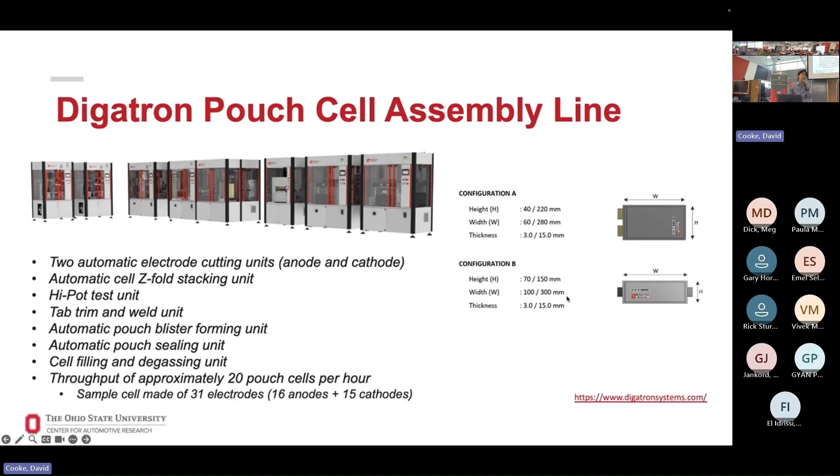Then we are currently discussing the scale of the cell. It's kind of a flip form factor, but we still have to accommodate some special standardized cell sizes because the slitting machine and this whole assembly line is dedicated to relevant dimensions. So we are actually under discussion to set the scale. The smallest one you can think of is 40 by 60, but configuration B, the largest one you can go is 150 by 300, so that's 15 centimeters by 30 centimeters. That's a typical form factor for EV cells.

So we have the pouch cell forming and aging machine. I don't believe it's live with OSU yet, we are waiting for them to come here. And we have the Digatron pouch cell formation equipment so that they can make a formation of the cell.

Calendaring and slitting machine is part of the process. You have to calendar the electrode to optimize the thickness and porosity of the electrode. At the same time, slitting is simply cutting, mechanically cutting at a specific dimension that is dedicated for that cell design.

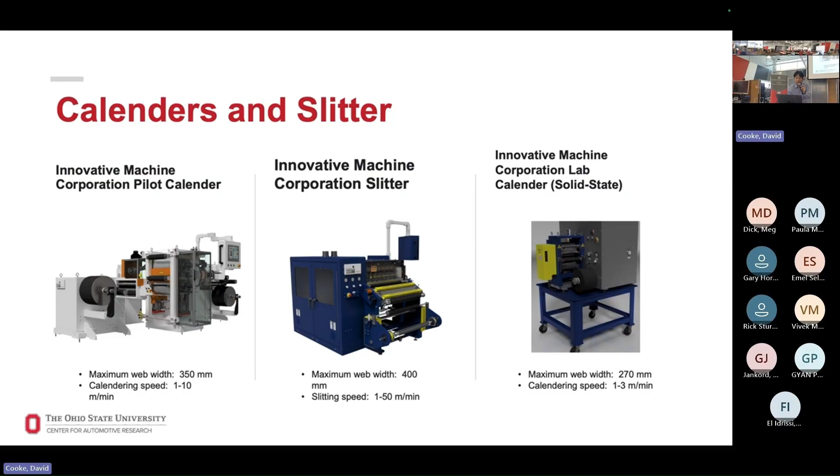We also have the warm isostatic press. It's not typical for lithium-ion battery to have this warm isostatic press, but it's more like a solid-state battery cell, because we want to apply megapascals of pressure at elevated temperature. You can apply 600 megapascal pressure, so that's 6,000 bar, and max temperature is 145. The goal is, because this is not liquid but solid, if you want to densify the solid electrolyte, you have to mechanically press it. A uniaxial press is maybe good for lab scale, but if you want battery specifications, isostatic press with temperature is the way to go.

So I know it's kind of a luxury, and I know that many industry partners try to make the cell without having that isostatic press, because it's kind of expensive equipment and slow. But I can say that this isostatic press has been used in the food industry for many years. For example, they actually use isostatic press as part of food manufacturing processes.

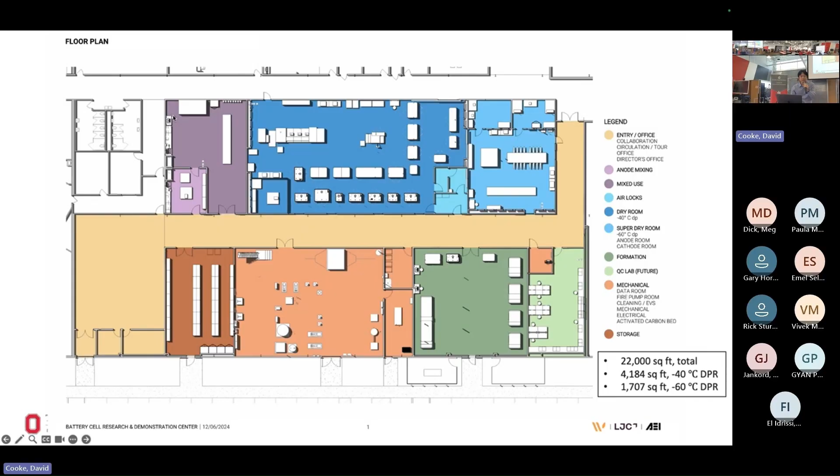This is actually the anode mixing bay. We have the anode coating machine independently, and in the future another anode coating machine will come here. This is the anode mixing bay, and the Quintus high-isostatic test equipment will be installed here so that we can use it as part of the process. Besides that, we have a small mixer.

So it might be best to just walk together down and explain more detail with real examples. Thank you for your attention.